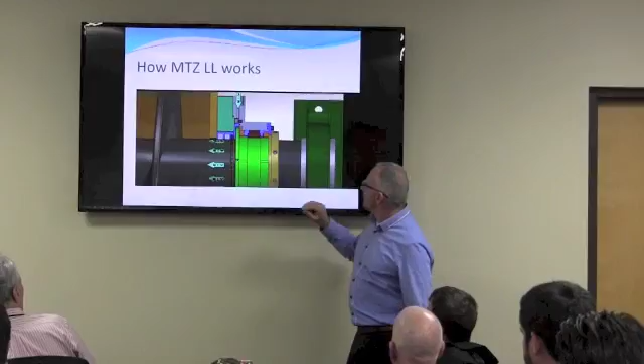Okay, so let's run it. This is a screw feeder, as you see. This is our seal, and this is for cutaway - this is a demonstration. Please stop running. Okay, yes, stop. It's me. Stop, okay. So...

And in that way, you can see what is going on. We have in the seal what the sealant that I'm talking about. What is the sealant all about? Sealant is a material. Give an example of a sealant. We have it there.

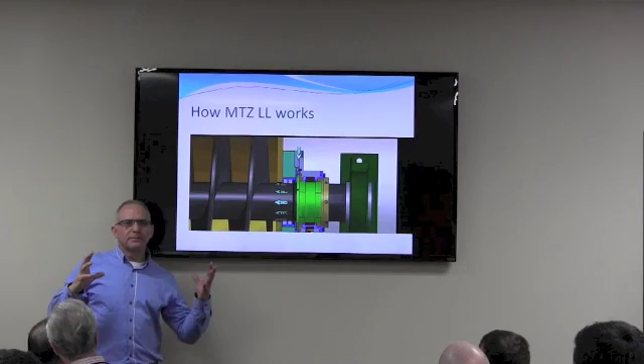Sealant is like graded packing or lubricant, but this is about it. We sometimes add some ingredients to it so it will be stiffer and can hold the pressure, or so forth. But this is the sealant.

This is the seal. On both sides of the sealant you have packing rings that hold the sealant so it will stay in here. And we have a sleeve. The sleeve has a special geometry that creates, at that point, vertical faces, and this area becomes like a mechanical face.

With the sleeve and sealant, they are in parallel faces. One is stationary, one is rotary. So this is like a mechanical seal.

So you have sealant, you have packing rings like packing, and here you have a labyrinth, and here you see the air coming, and in that area it creates high pressure, and the air goes against the process. Here you have a packing ring as well, in order to maintain the lowest tolerance possible, so you don't need to waste much air.

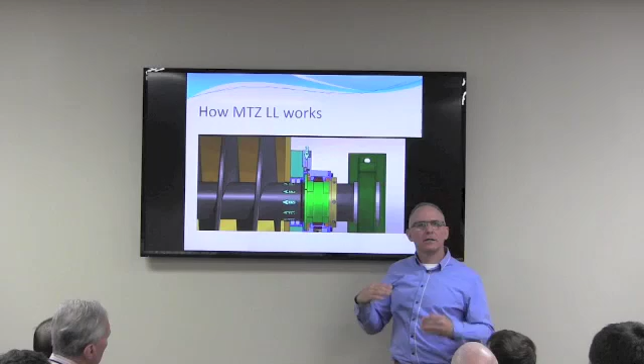We put high pressure in a very small place in order that the process will not go in. But we don't want to waste air. We don't want you to buy more application, more machine that creates air. Compressor, of course, the process will say use whatever compressor you want, but we want to stay efficient.

Let me mention one thing. The flexible sealant fills every nook and cranny in that annular space around the OD of the shaft sleeve and the ID of the stuffing box. It does not move, it's static, it's stationary. So it's like a stationary seat in a regular mechanical seal.

The crenellations, or the ridges machined up and down the length of the axis of the shaft sleeve -- the vertical part of those ridges are like a rotating head on a mechanical seal. So you've got a flexible stationary seat and a rotating head, and you've also pressurized that flexible stationary seat.

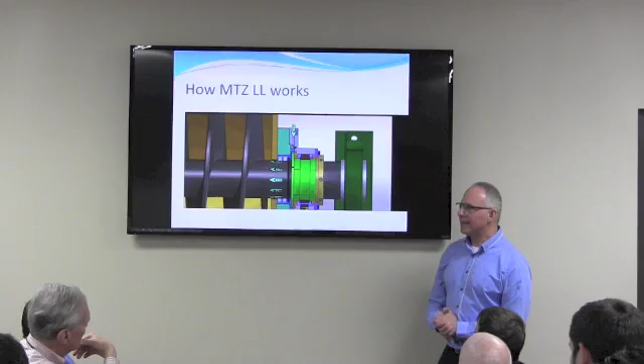So in one seal you have packing, you have injectable sealant, you have something like a mechanical seal, and you have air pressure, all in one seal. This gives you some insight to understand why it's so strong, why it holds up in the kind of environment we're talking about with this seal.

So this is the theory, and of course you would like to see some kind of demonstration of it. I will start with something that we installed here in the US.

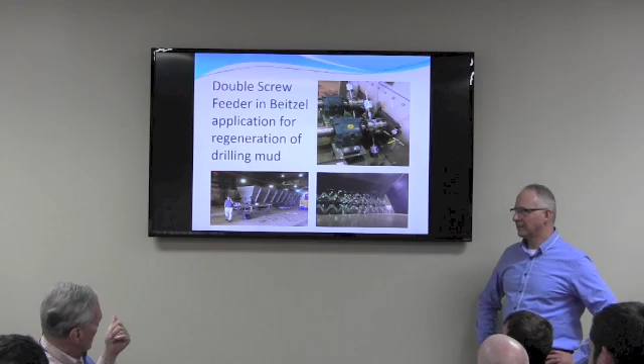Yes, you've all heard about the shale oil drilling up in North Dakota. This was up in Williston, North Dakota. This Beitzel was actually made by a company in Pennsylvania that made a machine for reconstituting drilling mud. One of our visitors here, Rob Porbeck -- his brother Frank Porbeck owns Porbeck Engineering in Little Rock -- and they designed pretty much this entire plant and the way this seal fits into this machine.

You can see here you've got two shafts, two screw feeders, and drilling mud is reconstituted when you dump the used drilling mud into a big grate and down into a hopper. It feeds this big hopper and container right here with the screws. The screws mix it up, and then they take it to a heater, a very special heater.

Made by a company called Thermoflight out in California, it bakes the old drilling mud and gets rid of the diesel fuel and everything else that's a contaminant. And they actually reuse the drilling mud. They re-inject it again, so it's just a continuous process over and over again.

This top right-hand photograph shows these were 5 and 15/16 diameter shafts. We put 2 Tamar seals, split seals, on each side. Those seals weigh 120 pounds apiece. And you see we're using 2 boosters.

The reason is one booster will typically handle up to maybe a 3-inch diameter shaft, give or take. In order to stay with a constant pressure all the time, since it's such a large diameter, you need 2 boosters in that kind of case.

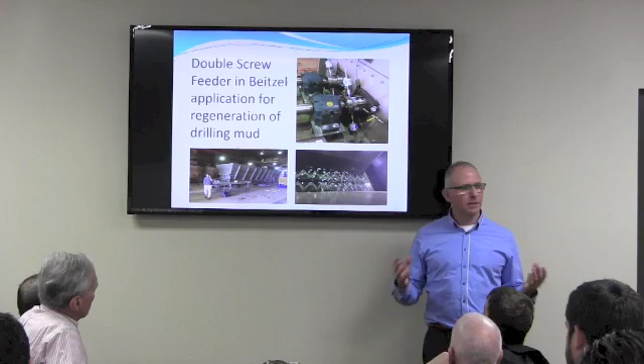Again, this is a split seal. We're able to provide you a split seal which is easy to install, easy to maintain, easy to take out and pull back. And how much time does it take for you to put these seals in?

We had three hoppers, each one had two seals at each end, so it was a total of 12 seals. And I'd say to install everything -- you can see up there the weld marks on the top right-hand photograph where they had to weld the end of what is really the metal stuffing boxes to the side of the hopper -- it probably took 2.5 days to install all that and put it together.

Those shafts turn at about 1 RPM. They're very slow turning. Let's see them. So when did you install it? That was about 1.5 years ago. And just see, this is low velocity. Very slow turning.

So the blue tubes are what, Dad? The blue tubes? Those are just air lines going to the various boosters and the air flush on the seal. And this was just set up, this is not the way that it ended up being, that's just the way that it's set up from the test.

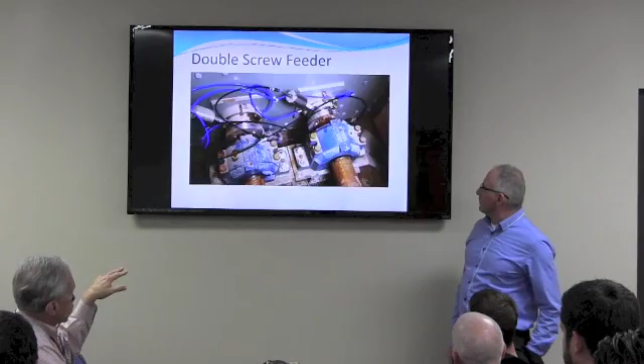This is the nut, look at it. This is the bubbles from the air flush. So this is the grate that the truck actually backs over that has the used drilling mud and then dumps it into this hopper. That's actually top of the hopper. You're seeing they're full with liquid under the grate. We are talking about mud, sand, abrasive, with oil inside, and so huge.

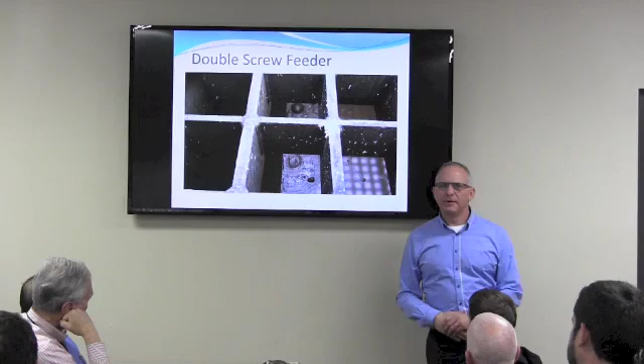The tolerance there is not so tight. So just think about what kind of application, what kind of sealing can work with that kind of application. Packing. So Tamar seal worked 1.5 years and more, and it will be quiet for the next 5-10 years to come. Let's go continue.

Another nasty application is sugar. It's sticky, crystallized, very hard to work with, very hard to seal, and when you use packing, it always leaks in sugar. It's sugar, it's sweet, so flies come and build, and it's becoming a huge problem, environmental problem, and people cannot work. It's very hard.

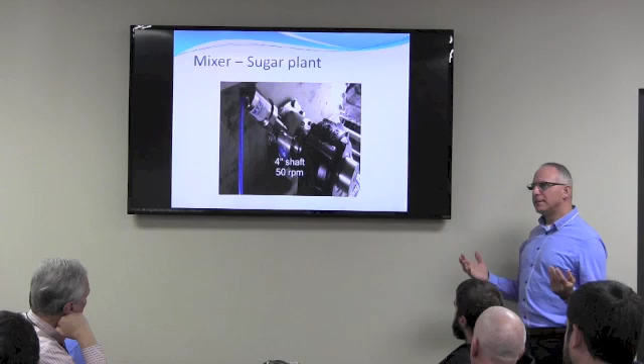So there is quite a big factory in Israel called Sugat, and this is what you see. They installed our seals. This is the 4-inch, but right now we are continuing installing more and more seals in that factory. Last month it started right now, 8 seals, 6-inch shaft, and we are continuing. They understood that we have a solution for them, finally, after all these years.

These are demonstrations about the abilities of that kind of technology to help you all figure out and work with materials, applications that right now we have problems with.

Another tricky application is that one, which is 7-inch shaft diameter, 20 RPM. Problem in here was this is an agitator. The problem is that it rotates and also goes up and down. Reciprocates. Well, let's move forward.

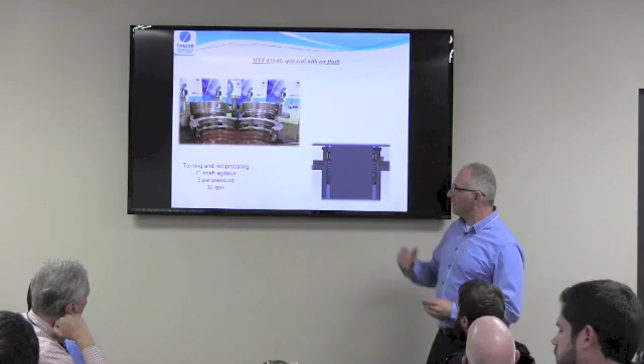This is a split seal. We installed that a few years ago. You see the shaft here, the colors - it's so hot there that they change the color of the metal. It's rotating and moving.

This is our seal. Point to the booster routing in the seal. Okay, first you see the booster, you see the seal here. This is the MTZ, this is the seal. You have a booster on the backside on that one as well.

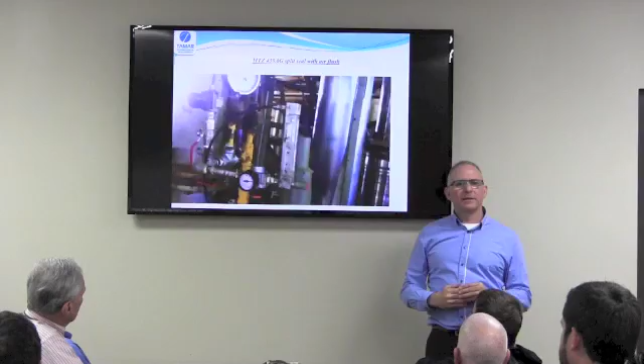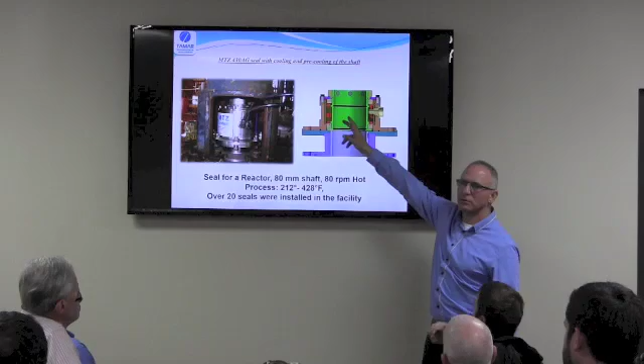Okay, so let's move to another agitator in the same place, a very hot one, 428 Fahrenheit. So what we did here, we put a pre-cooling jacket here below, and the unit itself is also cool. So we're able to run very nicely in the cooling environment, seal very nicely this application without any problem.

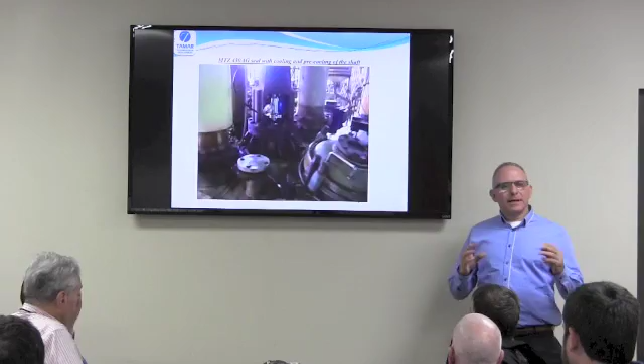Again, I would like at that point to describe to you the engineering behind Tamar. When Ronnie had this idea, he went to his brother-in-law called Dr. Santo, who is one of the professors in Ben Gurion University, and this guy is an expert in finite element methodology. And he thought about Ronnie's idea, put it on a computer, testing and all of it. He said, okay, it will work. Great.

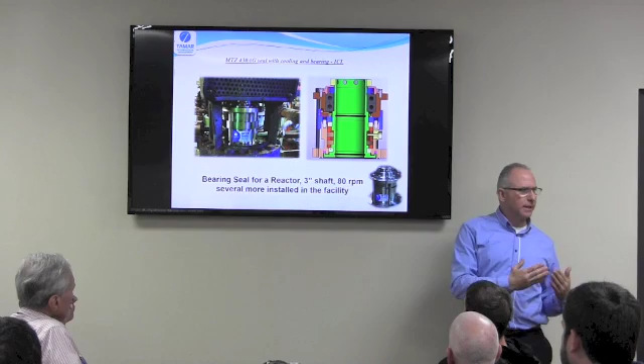And he advised what to do for the next one. We're talking about the next one. He has a son, Nir Santo. Nir Santo is going to be a doctor in mechanical engineering as well. And then Nir Santo is the head of engineering in Tamar Technologies. I mentioned all of this because you see here, there is the innovation, and Ronnie has innovation every day, almost every day. We come in with a new thing, but everything goes through a process of engineering, testing, to provide you in the end a solution that was tested in the computer and in real life as well.

What you see here is the seal with the bearing, all of them in one unit. The run-out here of the agitator was wide, so we put this bearing and it's going to fix this situation.

This is a very strange application, but you will meet such things. It's called a bucket elevator.

You know that? What is your name, please? Trisha. Nice to meet you. Where are you from? I work at Lucite. I've actually seen bucket elevators at two other places I've worked.

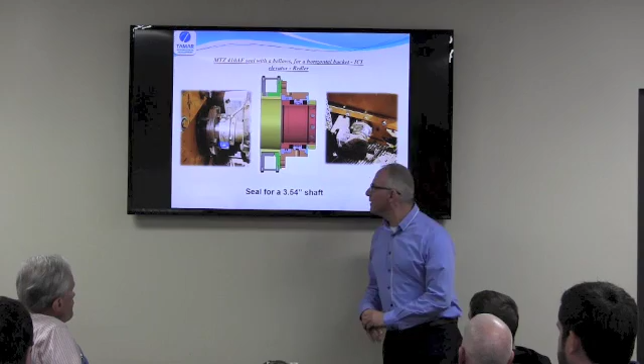Yeah, whole industry. So what can happen in a bucket elevator? This one is a horizontal one. The powder is so fine, it's like water, just splits all over it. So we tried many things, and here you see the solution, Tamar Technologies.

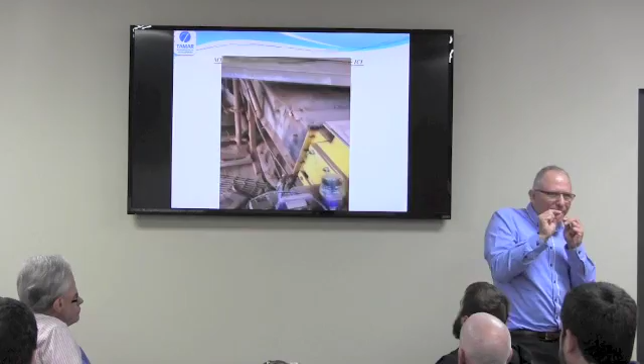Okay, just run this video. Because it's so fine, like water, we put in the back an automatic greaser that closes all the tolerance you have in the packing, plus the injectable sealant. The grease closes all this tolerance because the pressure is very low. It's just a bucket elevator, and in the end you have a perfect solution.

Note that the booster does not use air. It's completely self-contained - that's a different design booster that Tamar has for certain applications.

Yes, what it does is when you have areas where you need to close it in a small place, we put in this tolerance because something is moving, and the packing of course cannot trace the fast moving elements. This is why you always have leaking packing, because the shaft is vibrating and the packing cannot run with it.

The injectable sealant is closer than that because you have constant pressure and you also have the seals, but in places where you have material like water, we add the extra - the automatic greaser - that closes all the gaps, so you have a perfect solution.

How long does the sealant fluid last? Do you end up having to replace it?

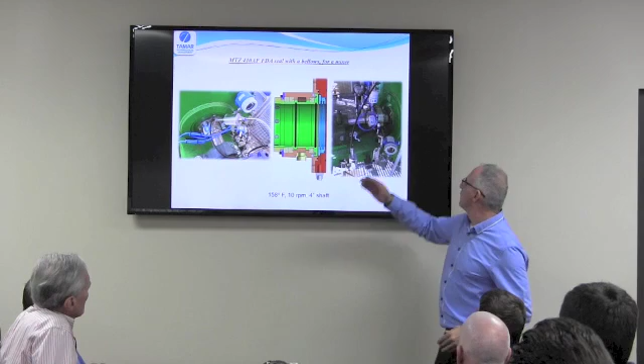Recalculating. Okay, so there is a change in the shaft itself - it moves ahead and back around 1 inch. When it's hot, it's there; when it's cold, it's here. We need to cope with it, so we add a bellow. The bellow takes these differences, and our seal holds it.

This is in the US, next to Chicago - you will find that solution there.

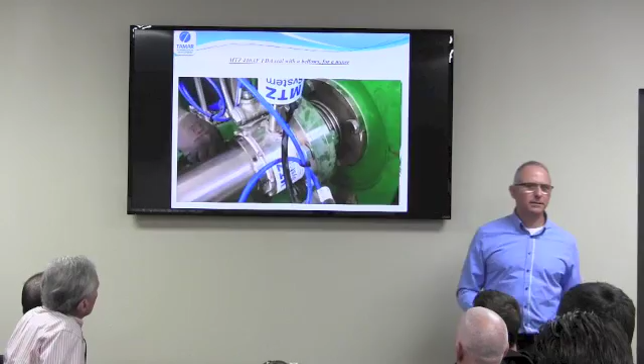This is the installation of the seal. Again, most of the seals are split - easy to install, easy to maintain, easy to work with. So for you, it's a really great benefit.

You see this is the booster here, connecting, and this is the bellow here. With each seal, we provide also a control panel that lets you control the pressure of the booster and the pressure of the air flush.

If you need to add air flush to the system, you can control it. The air flush should be the same pressure as the process, a little bit more, but not more than that, so the influence of the air is minimum. It will not influence your process - it does everything good for both sides, the seal and the process.

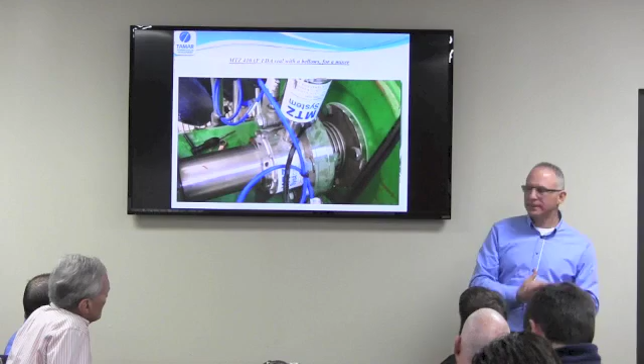Okay, so again, ICL, a pug mill - do you have a pug mill in your area?

Let's run it. Okay, this is a test - this is a very old movie, I think 7, 8, 9 years old. And you will see here - stop, can you stop it? Okay, run it again.

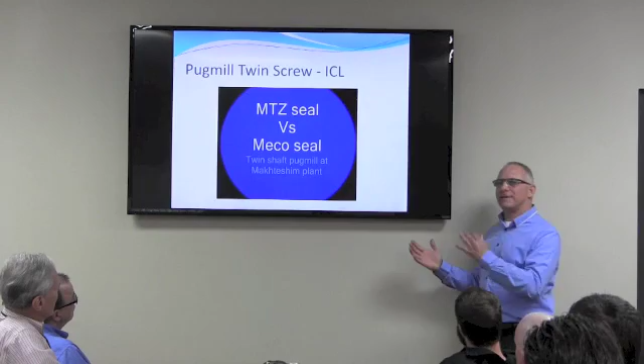So they wanted to do a test - they put a Meco seal and a Tamar seal one next to another and said, let's run and see who's better. What's more, after 3 months we came to see - you see this one is dusty because it's not new, but here it's clean, look at it. Meco seal is a very nice product, but it's very limited. You put a lot of air, but when it's out, it's out - that's it.

This is the main problem with that kind of solution. While this is a dynamic solution, you see there is a booster, there is a reservoir here, and always there is a pug mill. It's a very big one, robust, and the tolerance there is a disaster. So you need always to be like a babysitter.

So this kind of solution, this is what it does. It says, okay, I understand that you cannot be next to the machine all the time, I will be here with you. The booster puts the sealant, that's it. Once in half a year, they add a little more sealant, that's it. Five minutes, and they can add the sealant while the machine is working. You don't need to stop, just add a little bit of sealant, continue.

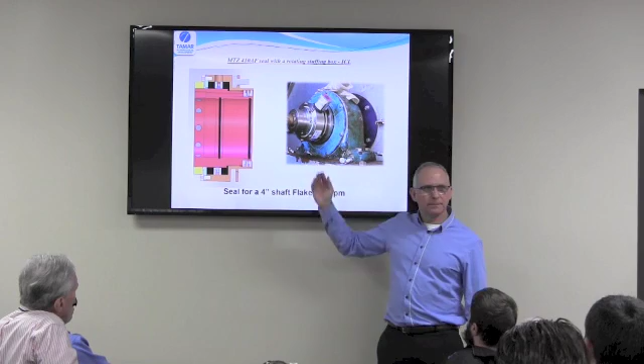This is quite new, ICL flaker. What's strange in that is that the stuffing box is rotating and the shaft is stationary. This is a different approach, but here, see this is the cutout of the seal, and let's see it running. This is ICL here, and you see it rotating here, and this is the booster right there.

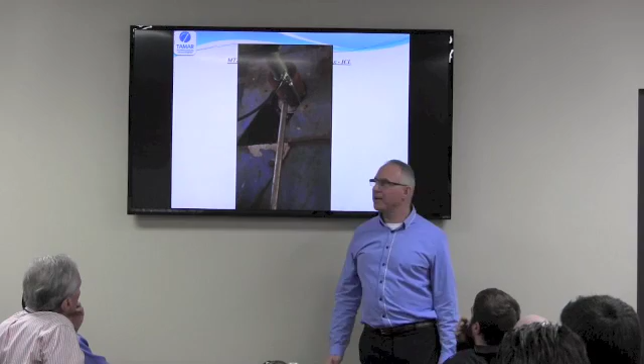So you see that there are many applications, many kinds of applications. You need a strong engineering team that looks at the problem, sees what we can do, and designs a solution for you. Again, inside it will be the same. We're always talking about how to take this good technology to your application. Inside will be the same. It's very easy to maintain, very easy to work with. All the problem is to put it in your system.

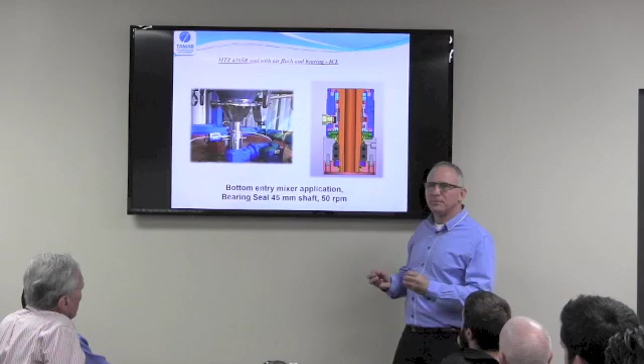This is a bottom entry, very hard to seal. Bottom entry mixer, and we put bearing here and put our seal here. You see, this is the entrance to the booster. This is where the sealant goes. This is the packing, we have it. This is the air here.

Nitrogen, okay, thank you. This is nitrogen. And this is...

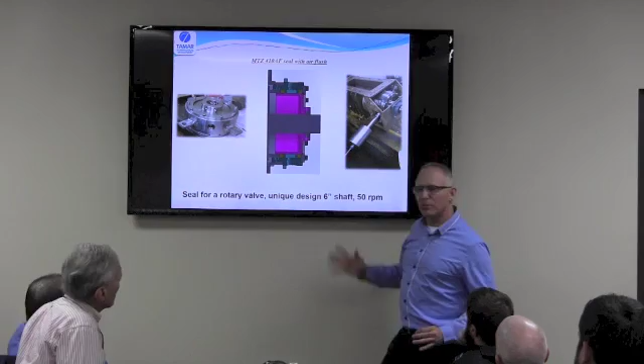As you see, a rotary valve, very old one. So the very old rotary valve, they put the packing not in front of or on the shaft itself, as you see here. They put it very distant. So they replace packing every month, something like that. Until they had enough and said, okay, we understand we need to fix that. We changed a little bit their design, we put something, but in the end we put our seal, and that's it.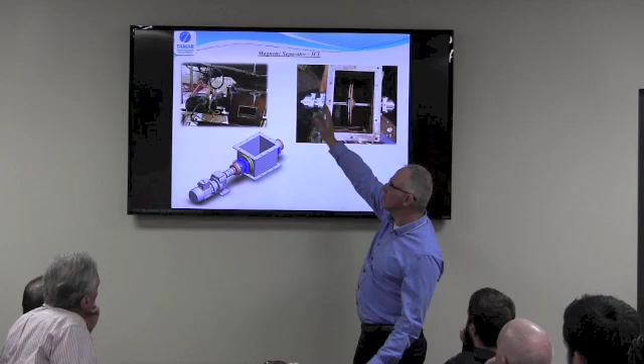Sometimes you see the design of elements, and you think to yourself, hey, my friend, you didn't think that it will ever go to leak? This is what do you think of? Well, these guys took the magnetic separator and put the gear on the shaft of it, and said that the gear will be the seal. Gear seal, this is what they started, and this is magnetic separator.

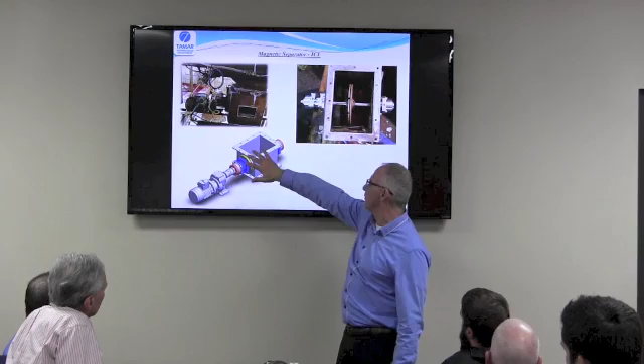It means it should collect the metal parts in the process, and metal parts now are quite abrasive. So in the end, every few months they replace a gear, stop the system, blah blah blah. Well, they asked for our help, and we designed. You see all this, take the gear out, put everything inside, and we engineered all this environment in order to provide the solution. You see here the seals, they installed it, they were happy.

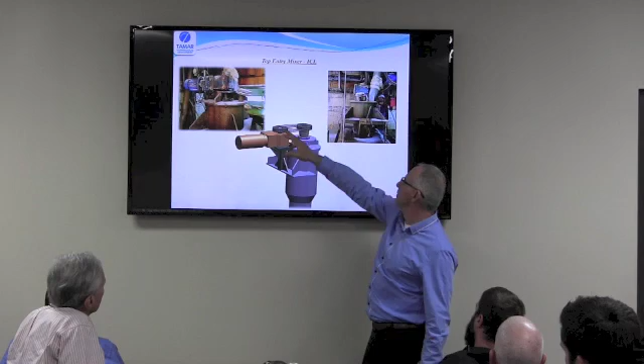Another one where we took another step in engineering, not just the seal itself, we engineered all the system that holds the seal. This is top entry, we took, again, they have problems. See this one, only this is the packing, the problem, the heavier that water went inside and contaminated the process. There was a problem with that. So we took all this motor and gear out, put the change here, and put our seal here. And they did all these changes, and it worked great.

Okay, this is about, you see the application we're talking about, low speed, mostly low speed application, but robust, using abrasive material.

A big one. It's a lot of work and a lot of understanding what's going on there. And the solution here provides you 100% success. And all the applications we did, that kind of application went well, and we are very happy for that.

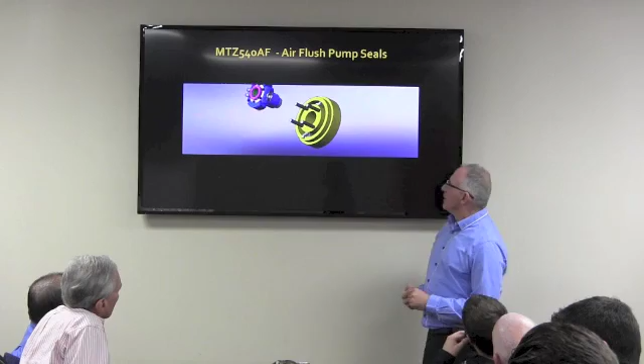So let's start with high speed, okay. As you can see here, this is a standard seal. It's a replaced cartridge. You take out the regular seal, you put our seal in, and it's plug and play. That's the beauty of it. We took all the things we talked about and compressed them into a small space here. You need to be very accurate and know-how in order to do such a thing.

So it took some time, but we succeeded. This guy, as I told you, is a genius at that. So you will see a cutaway of this pump. Ronnie, if you can get a little closer, run it, and I want to see it a little bit closer.

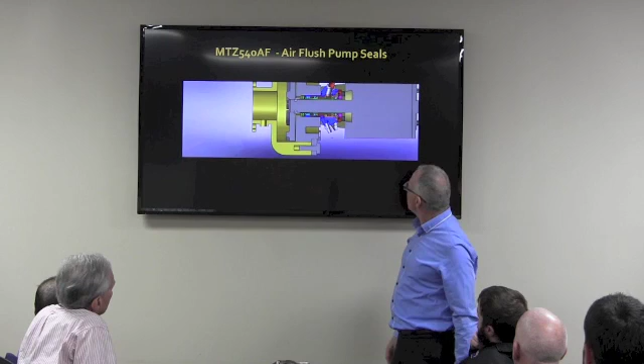This is the air running. Close, stop here, stop here. So what you saw in the big seal, the LLC, you can see here as well. So you see the compressed ring, you see the sealant, and you see here, this is the air coming from here, and it creates

high pressure. It's a small place. When you put air into such a small place, it becomes high pressure. And if you have 5 bar in your lines, you will have 5 bar, so it means you can hold 5 bar against the process - I mean the stuffing box pressure. Okay, it's not the stuffing box pressure.

So this air goes from here to the outlet of the pump. I know that you read in your book that you don't need to put air in pumps, something like don't put air in pumps, and we found that this is not the case here. But we tested it, and we saw there is a big difference between regular air that goes from the inlet of the pump and this pump, because if you go from the stuffing box, it doesn't interact with the impeller - it just goes out with the stream and that's it. It doesn't affect the pump at all.

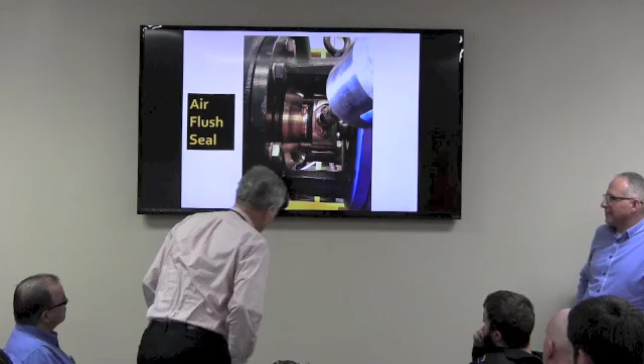So what I did was I had a plexiglass stuffing box cover made for this ANSI pump, which is right here. I wanted to see the bubble, I wanted to see the phase separation. So here it is right here - this is the beginning of the bubble, which extends back here. This is your impeller over here, this is the booster. We're pumping water, and we're not leaking. There's the bottom of the bearing housing right here. We're not leaking, so it works. This is the real deal.

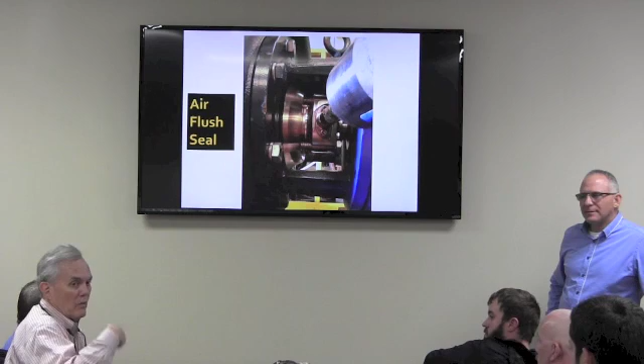So I proved to myself that this thing is not just some smoke and mirrors deal or some idea that doesn't make sense or doesn't work - it really works. So the air is distributed evenly around... It's like a ring, a ring of air all the way around. Yeah, and that's what you're seeing here on the left, the injection tube, where it's turning.

We use it there for different applications, but when we asked them about the pump, there was something written in the book about air inside, but when we test it, we see what it actually does. We change the design of the seal, and we see the result right now.

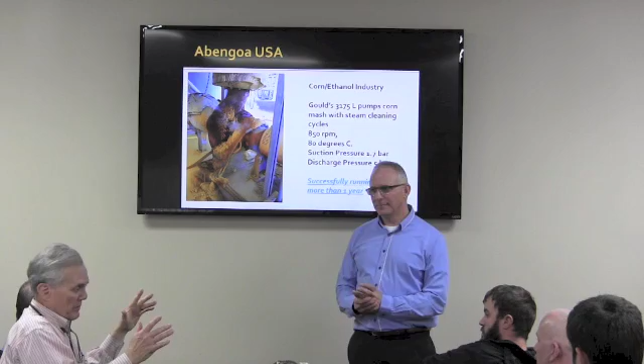I'll say this in about 3 sentences. This was about a 6-month project to put air into the seal and see if it vapor locked the pump. We did it with the Gould's 3196 1.5 by 310 that's got balance holes in the impeller. Everybody said, well, the air is going to bleed through the balance holes on the backside, come over, put a bubble on the nose of the impeller, and vapor lock the pump. It didn't happen. It just doesn't happen.

And so the air doesn't even really get consumed either? Well, the air gets consumed - about 60% of it goes out the front of the stuffing box, about 40% of it goes into the process. The amount of air on a 3196 MGX 1 3/4 inch shaft is like 0.18 CFM - it's just not much. And only 40% of that 0.18 is going into your process. So, this is an example.

So this is the theory, but I would like to show you application after application of several things we checked with our seal.

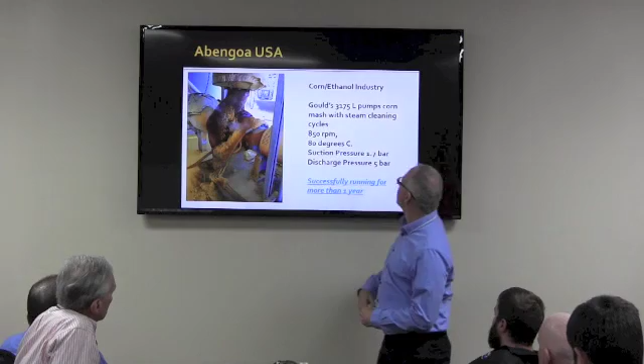When we came to North Chicago, we saw something like this - corn ethanol industry. Right now it's a very hard situation where the oil is so low, but still the corn here is sticky, it tore the seal's faces and everything is like a swarm. So this is what we saw when we started there, let's see what happened after.

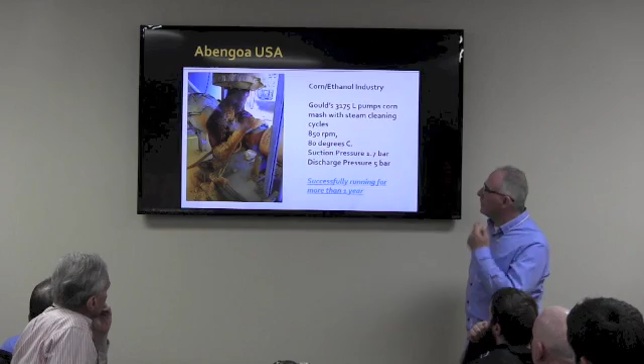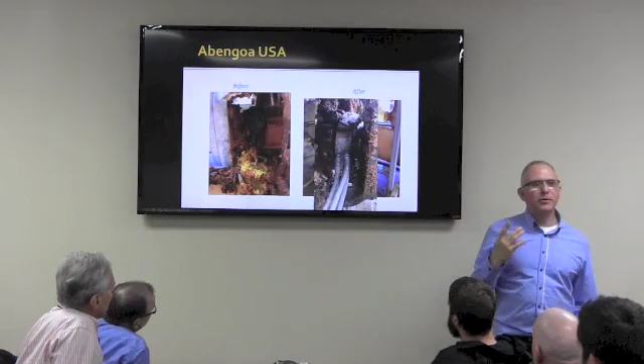So, running - this is after 1.5 years. See, it's very old, but still clean. Still clean. This is the beauty of that. When you put the air against you and the process is not coming, almost not coming, it's a different story. It's a different approach - this is dynamic, this is the acting.

Okay. Zach, I think this is a movie. Let's go to the movie here. Okay.

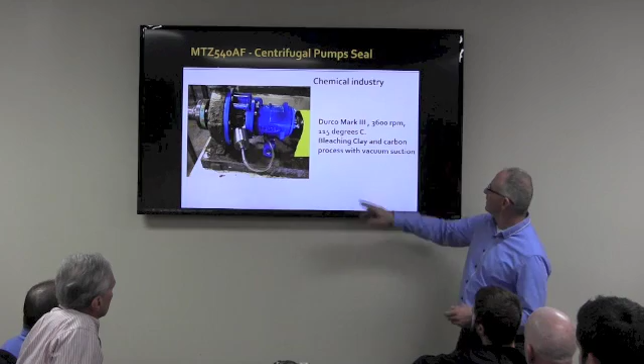Jack Tyler Engineering of Tennessee and Tamar out of Israel install a Tamar 540 air flush seal on a 3600 RPM Durco at ConAgra Foods in Memphis, Tennessee. About 25 minutes into startup, no leaks, no packing protruding, stuffing box temperature about 150 degrees Fahrenheit. Temperature of the seal about 115 degrees Fahrenheit. Again, no leaks, screw jack still in currently. Discharge pressure about 90 psi. Regulator on the bubble set to about 15 psi. Okay, thank you.

Vacuum suction - this is another example, but I just want to show you how pumps look like when you go to them. This is a situation where a mechanical seal doesn't work, vacuum doesn't work, and Tamar is okay. Let's continue.

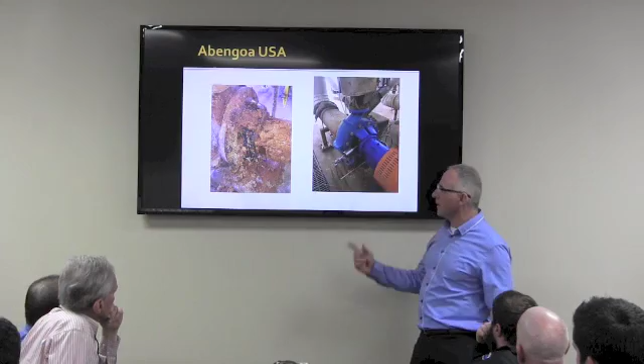Molten salt. We came from salt, we know what it's all about. It crystallizes and it holds everything and kills everything. But we have a solution for that - we put our seal here, it's running almost 2 years. It's crazy, and it's very abrasive. So it's running.

Jack: This is Samad Wire up in Dixon, Tennessee, about 35 miles this side of Nashville. The pump up there, I think these are two Tamar seals on two different pumps. They were using a mechanical seal on Italian close coupled pumps on some OEM equipment to pump saltwater brine for cooling where they draw wire for different companies. The mechanical seals were failing, the salt in the brine was crystallizing, as you can see in that top photograph. It was getting into the motor on the close coupled side and burning up the motor - it was a giant, giant mess. So they put the Tamar seals in, and that's been 4 or 5 years ago. Running great.

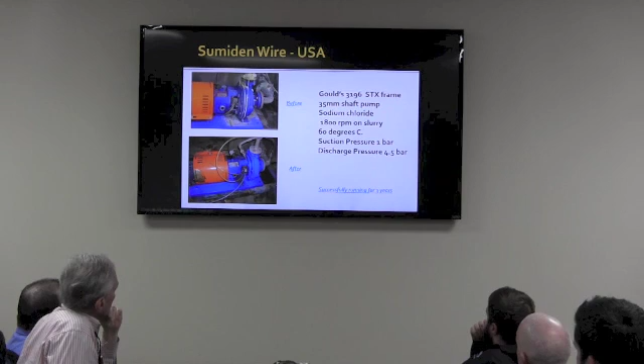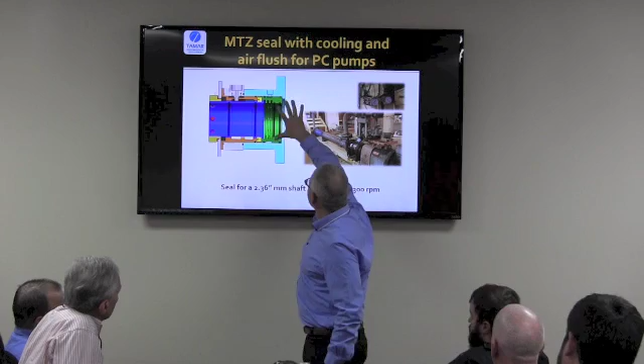This is a PC pump in a place in Israel, and what you see here is a mono pump, quite a big one. The application - there are several applications - sugar and cornstarch. Sticky, sticky, sticky. You see here, you have the air flush, you have the sealant, you have the press packing. The air flush is doing most of the work here. And again we put here the automatic greaser in order to close all the small tolerance, because this mono pump is vibrating, so we need to close this tolerance with the automatic greaser.

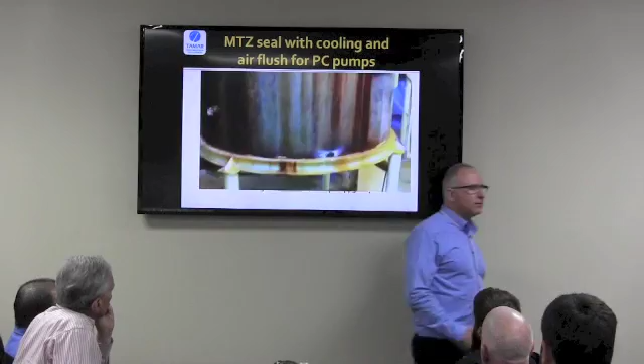Again, these are real applications - this is not just theory, it's here in action. If you have such an application, you have a solution for that. And this factory has replaced 6 of its mono pumps right now with Tamar seals.

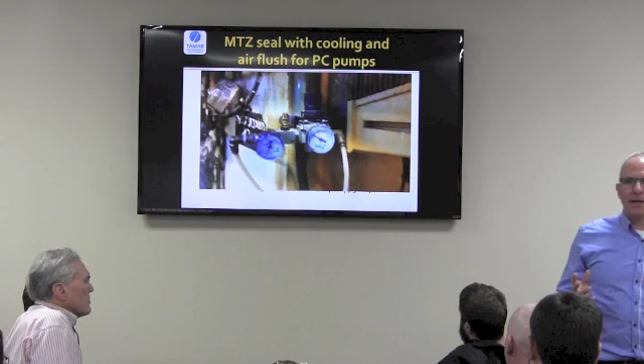Let's continue. You see here, we control the pressure of the stuffing box with this gauge - you have the ability to change it, and this is one of the big differences between taking a passive solution like a mechanical seal and an active solution like a Tamar seal. You have it in your hand - if the pressure of the system is high, you increase the pressure a little bit, put it in a steady state, and that's it. You have the ability to look at the stuffing box and change what's happening inside. This is a huge difference between what you used until now - put it in and hope for the best - versus having control over what happens inside the pump. This is the big change.

Why did you have cooling on the last one? Were you trying to cool it? In every seal, in our high speed applications, we have the ability to cool it down - we have a special cooling system. You see here, you have water in, water out. Yes, look at it, touch it. Okay.

You have free in and out. The water goes around to cool this area. Just pass it on with the guys that look at it. What's funny is that after one day of work, because it's running so smooth with the air, you don't need the cooling at all. You can close the water after 24 hours most of the time, and it will run freely, no problem. The air itself you just cool, providing a smooth environment. But the startup needs cooling.

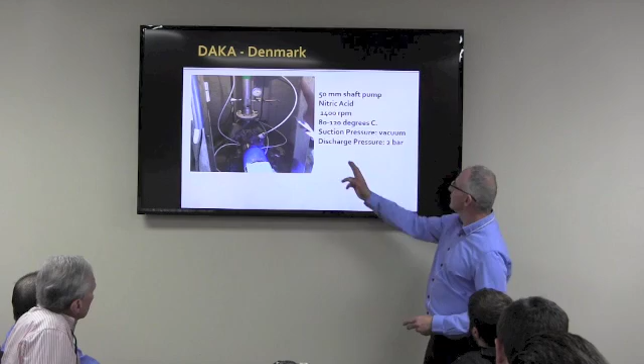Nitric acid, not easy stuff. What's interesting is the suction pressure, which is like a small vacuum. When the suction is a small vacuum, it's very hard to seal - the mechanical seal faces open, and the story and the carnival starts. Our seal can of course work with that. This is active, you don't need the process. It doesn't care if the process is in a vacuum, doesn't care if the process has launched, doesn't care if the process exists or not. It's like a door - a door is a door is a door, and a seal is a seal is a seal. It doesn't care if the process exists or not.

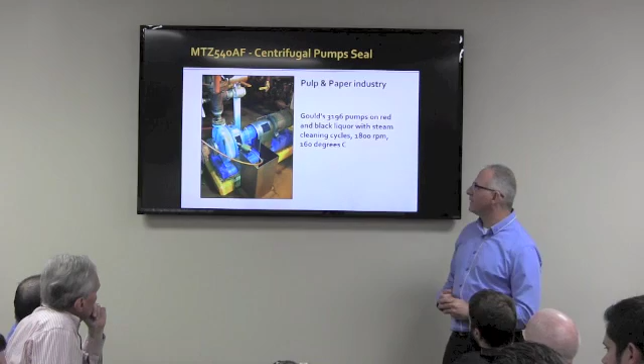Pulp and paper industry - wow, this is a big story. Whenever you touch pulp and paper, you see problems. Anyone here in that industry know about it? No? Okay. It's sticky, it's abrasive, it clogs, it's a problem. We have very good experience with pulp and paper. Good seals there, and it works great in the same manner I told you before. It doesn't care if it's sticky - great, it helps us. Because sticky is good, it helps us. Before the air, it sticks and stays there, and the air against the sticky stuff helps us against the other sticky stuff that wants to go in. You use one against the other, so it's okay.

Let's move on, and I want to show some guy who knows very good about pulp and paper, and can go further.

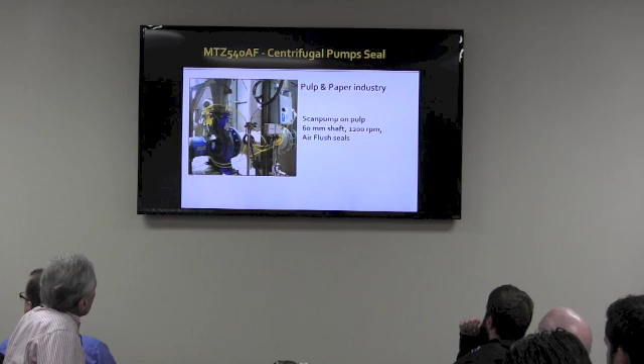This is a Scanpump in Israel. Again, we installed a lot there, and this one here - I want to show you this one, this one.

Knows a lot about pulp and paper. This is a pump up in Packaging Corporation in Tomahawk, Wisconsin. It's a Goulds 3196 MTX on black liquor at about 180 degrees Fahrenheit. Black liquor is a very insidious liquid - when it's at temperature it's very, very thin and will find any crack it can to leak out. It just does. When it sets up at room temperature, you can peel it off the floor and throw it across the room like a frisbee. It's just really weird stuff. So it leaks - it's very difficult to seal because it sets up so hard.

When they stop the batch process and pumping, the seal faces just coagulate and stick together. Then when they start it back up an hour later, it just shears the seal faces and leaks - that's the nature of the beast. So what they do in pulp and paper is flush the seal faces with water. If you do that, the seal will last a year or more. But the problem is it costs about $24,000, and we've done studies with 2 different paper mills per pump, to take that black liquor to the evaporators and boil off the water before going to the recovery boilers and using it for fuel. So it's very expensive to flush those seal faces with water.

So what we're seeing here is a pump that's run now almost 4 years. In between batches they hit it with steam on the suction side of the pump. When the pump pulls a partial vacuum on the suction side, that steam and hot condensate flashes, and that pump jumps all over that base. So a Chesterton seal was living about 6 weeks in that environment, and we've been in there now for 4 years, and with the air flush seal it just seals. This is the 1.5 - yeah, that's the 1.5 by 310 with the balance hose.

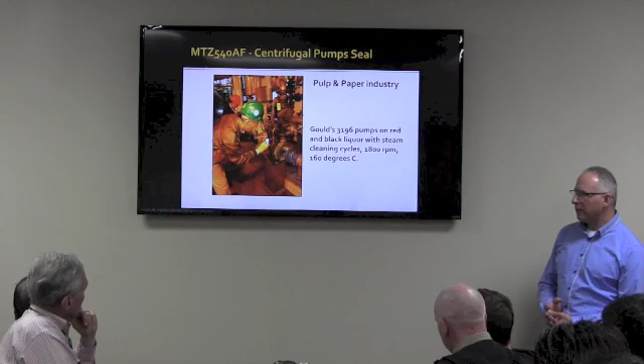We have the one in New York, that's Finch Paper. That's red liquor at 220 degrees Fahrenheit. They've got 3 or 4 of our seals up there. There's only 2 pulp and paper mills in the U.S. that run red liquor, and they're one of them. They came to a seminar we had here about 3 years ago at the Tappi show, ended up buying a couple seals, and they worked out real well.

So this is the difference between a passive solution and an active one. I'll tell you a cute story.

We were up there, Ronnie and Julie and I, about 3 years ago, starting these up on red liquor. The engineer was still a little skeptical, but willing to try it. The pump's running, they're pumping a batch, they're in process. Ronnie says, let me show you how easy it is to change out this booster and this sealant. So he walks over to the pump while it's running, turns the air off, unscrews it, and starts backing out the reservoir tube. This guy's eyes just got big. No, don't mess with it. No, it'll be fine, it'll be fine. So he does it and changes the tube out. I'm sitting there timing him, he does it in 3 minutes. It may not be the safest way to change out something, but the point is that if you can do it on the run, you can.

That same engineer called me about 2 years later. They had lost all power in the mill, it was dark. He was calling me on his cell phone, saying my pumps are starting to leak, what can I do? I said get an air can at Walmart or Sam's, go down to the filling station, fill it up with air, hook it up to the back of the booster. He did, and that got him back up and running until the power came back. He'd lost all of his compressed air.

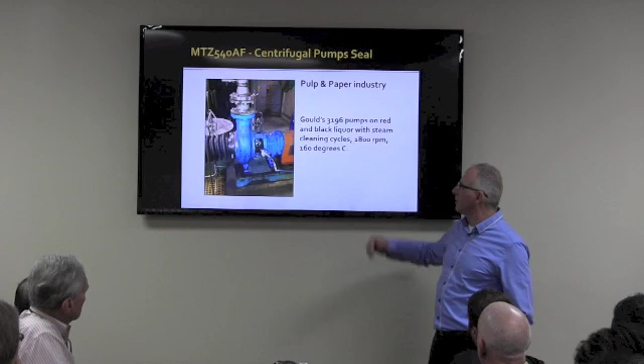So, again, this is a change of thinking. Right now the world is using mechanical seals, which is very good for standard stuff. But if you have something different that needs a different approach, we are there.

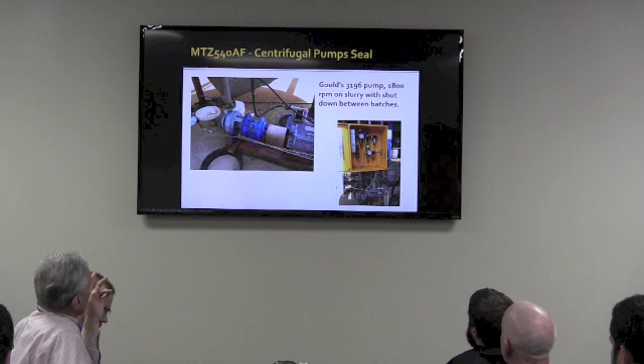Okay, let's continue. Finch Paper, just explain about the Finch Paper -- and this is Mid-American Distillations in Hot Springs, Arkansas. They blend a lot of different kinds of fuels. I'm not really sure what this is running, looks like it's a Goulds 3196. They've got the Goulds and Durco over there at that plant, but it's a Tamar seal. What you see under the stuffing box in that pan, that's where they were catching the runoff from the previous seal. But look at the channel going through the pan -- it's dry. The Tamar seal is not leaking.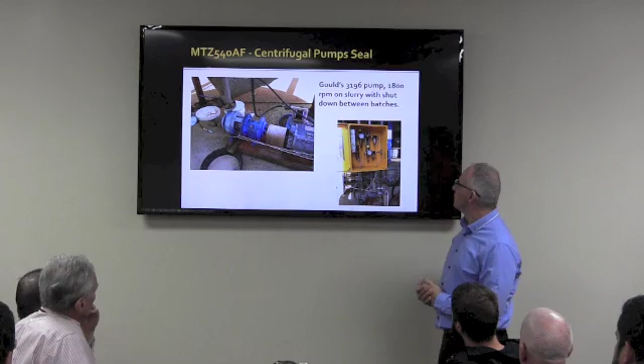And again, this is the control that we talked about. You have one on the booster, which is very easy to see, and one that's going to flash and create a bubble.

Okay, lime slurry -- we have several applications like that, and lime slurry is a really difficult application if you ever work with that. It's like sand, very abrasive. We have such an application in Sugat and also in the south. Again, the temperature is not an issue, the issue is the lime slurry itself. Whatever they put there doesn't work. Lime slurry is sticky, it's abrasive, and it ruptures everything that they put. Most of the time they replace the seal every 3 or 4 weeks, and they even afford to go to packing. But in the end, we put our seal and it works great.

You have a story, the lime slurry yourself? Yeah, we have some folks here from J. Huber, and they've got a Griswold lime slurry pump that we started to seal up on about a month ago, something like that. It's doing fine.

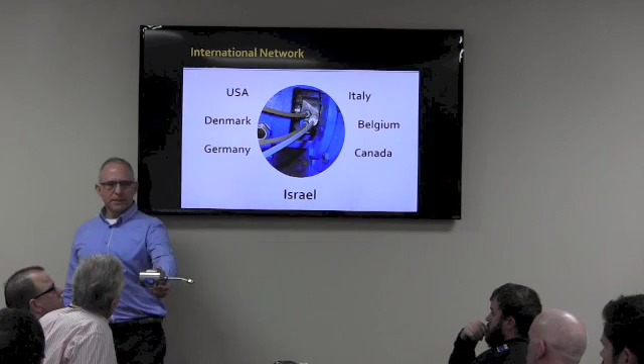So like I said, I'll pass it on. It's just a booster with a disconnect from the air, and you've got a rod here that tells you where the piston is in its travel. If the rod comes down, you know you're getting a little bit of sealant, so you fill it back up. You've got a reservoir tube that sits right down here. This screws in, has extra sealant in the tube, and this is your air back here, or nitrogen. You've got a simple O-ring piston that just moves back and forth, and this rod tells you the position of the piston. At a glance, you can look at that tube and see where that rod is in its travel and know where the reservoir is as far as sealing.

How long does the seal last? We've had some last 3 or 4 years. We've had others changed out at 6 months. I'd say 6 months is about the most frequent, but that's very unusual.

Could accidental high air pressure damage it? It won't damage it. What happens is it starts pushing the sealant out, extruding it through the seal. That's when you know you've got too much air pressure.

That reminds me, I'm glad you mentioned that, because right here, this is the procedure that I've got, and I'll pass this around. This tells you exactly how to set this seal up as far as the air pressure, and also gives you a little sketch on the back. You've got to have 2 separate air lines, one to the booster and one to the bubbler on the centrifugal pump. This gives you step-by-step how to do it, how to set it up. It's hard to mess up if you just follow those steps. At the very bottom, it's got a YouTube link where they talk about that and walk you through it.

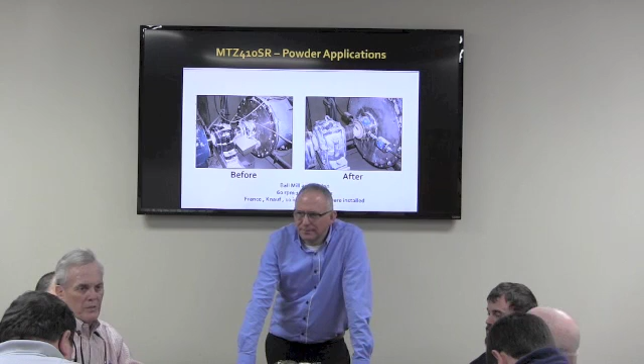Well, a couple of things. One is you've got the price and expense of the seal pot, and somebody's got to monitor it to make sure it stays full of water. Then if your water is compatible with what you're pumping but you don't really want it in the process, you've got to take it somewhere else and get rid of it. That's what Pulp and Paper has to do with black liquor, and what DuPont has to do with titanium dioxide slurry. And then with a double mechanical seal, eventually the inner seal is going to fail.

This seal really has nothing to fail. If you think about it, it's just an air bubble, and the air bubble just sits there. It blocks the fluid from getting to the part that could fail. So as long as the air bubble is in place, this seal will last a long, long time.

I invited the fellow from Precoat Metals in Blytheville to come. He wasn't able to, but he's got 98% sulfuric acid in a Goulds 3196 MTX. We rebuilt that pump in this shop. It's going on 4 years now, and he's using the same seal — we put the same seal back in after we rebuilt the pump that we had sold him originally.

So have you ever heard of taking a used mechanical seal out of a pump, rebuilding it, and putting that used seal back in? That doesn't happen. You just don't do that.

If you've got a high pressure pump, you have to inject air at a higher pressure. Bruce was asking about injection pressure versus discharge pressure, and the answer is it's not a function of discharge pressure, it's a function of stuffing box pressure. The formula for stuffing box pressure on a centrifugal pump with an enclosed impeller is discharge minus suction divided by 4, plus suction. Whatever that figure is, that's a close approximation of your stuffing box pressure, and that's what you need to overcome with the bubble to seal and keep the stuff from going down the shaft and leaking out on the ground. So it's almost never as much as the discharge pressure, which is good, because that would make it difficult for this system to work.

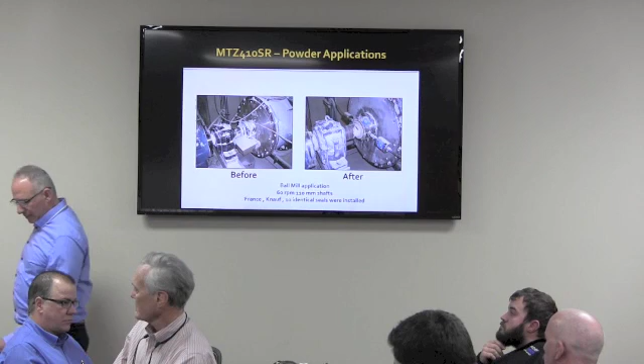Is it sticky? He's asking if it's sticky. It's below 100 centipoise — viscosity is below 100, so it's thin. But it's the highest solid content. Is it abrasive? Not quite as abrasive as TiO2 was. Yes, it's abrasive, but not as abrasive as titanium dioxide.

Which kind of seal do you work with now, mechanical seal or packing seal? Mechanical seal. It works when we leak some fluid into the slurry feeding the spray dryer. How long is the life? They don't change them that often — probably 2 or 3 years.

We don't want to replace all the mechanical seals — this isn't a solution for everything. But leaking was the problem, since you can't have it leaking back in. Spray dryers are evaporators, so any fluid going in with the solids decreases your capacity. So we can look at hose pumps — we've had success with hose pumps getting it less than the packing.

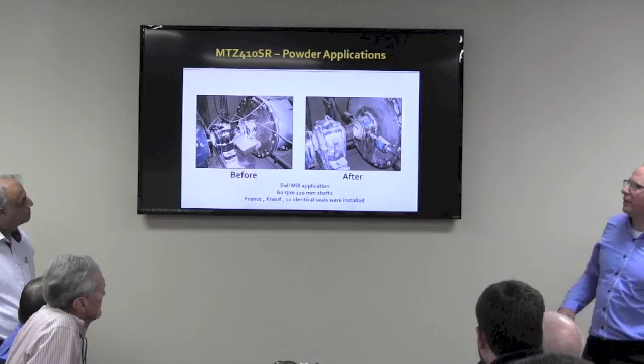Okay, I would like to do a small brief on what we did — just run through it and give you some application examples, whether you've seen it before or not, and some information on setups like this, before and after.

If you have an application like this — another solution, like a ball mill — you see what they did before: they put a bucket to catch the leakage, which we of course solved. Powder — you see the screw feeder, this vertical screw feeder. This is for a lemon acid plant in Israel, using a Tamar mechanical seal.

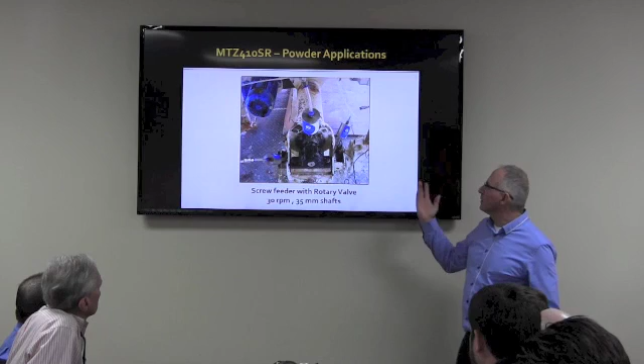After months of use, you will see a lot of screw feeders here, but this gives you an idea of what we can do with that. Any kind of powder application, at any angle, double shaft screw feeder, single shaft.

60 degrees, 70 degrees, everything. You go Hastelloy, we talk about metal, Hastelloy. Well, you see the degree of the screw feeder. This is what you have there, so everything goes down and kills the seal. We have a solution for that.

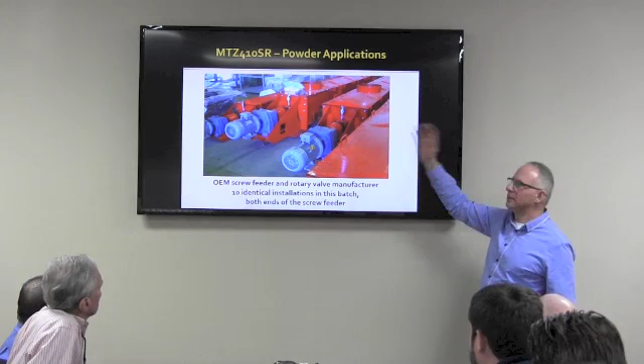You see here, this is one. This is the other. See how many years, months it's still working. You see, this is not new, but there are applications that have been running for many years.

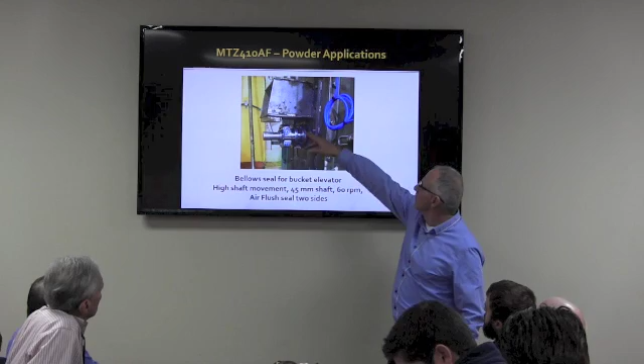Here, this is a bellows seal with high movement. One of the biggest problems is when the shaft is vibrating, and the run-out compresses the packing, pushes it to the side, and then there is a leak. We can handle all of this. If there's bellows or other things, we are more flexible because we have this active design.

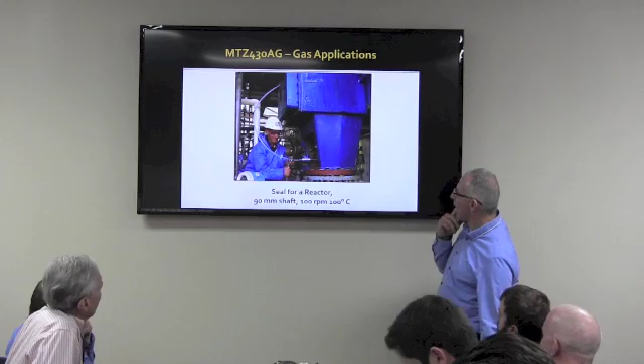Reactors, 90 - this is millimeters. I don't know if you know millimeters. Yeah, this is the Tamar seal. You will see seals all over, Tamar, one after another. But also reactors for aerators, agitators, dryers. This is one of the reactors during installation.

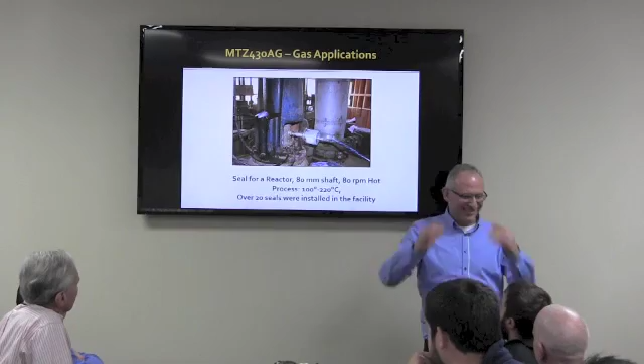So this is a solution for that. Right now they changed all their seals to Tamar seals. Okay.

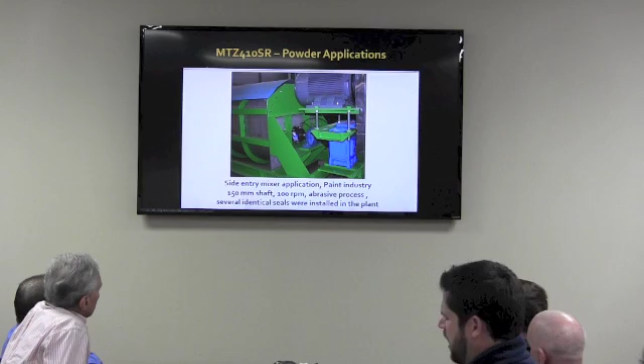So this is in brief. I want to show you one of the things. This is one we already went through, and you saw that - I just want to remind you. So this is about the technology itself. So, any questions about the technology?

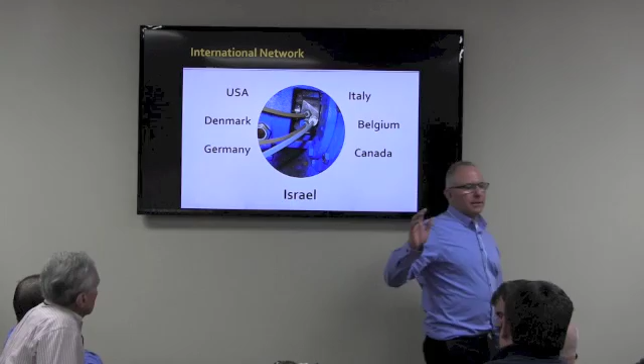Jack is here, he installed the seals, knows how to take them apart and put them together, knows the matter with the seals. We are, of course, here as well. If you have any question, this is the time, friends.

Jack, the application we were talking about at Tamar - I haven't had the opportunity to look at that. Is that going to be low RPM? Yeah, it was low RPM, it was on a crusher, with 6-inch diameter shafts. He was looking at using an Inpro air seal, and they quote on their own website 10 CFM per inch of shaft. He had 3 of them, so 3 times 2 would be 6 seals at 6-inch diameter - you do the math, it's like 300 CFM. It's just crazy.

Because basically that design, you're just blowing air on the shaft to keep the powder away - it's almost like an open jet, so you're using a lot of air to do that. Right, and these are using less than 2 CFM, right? Or less than 1.